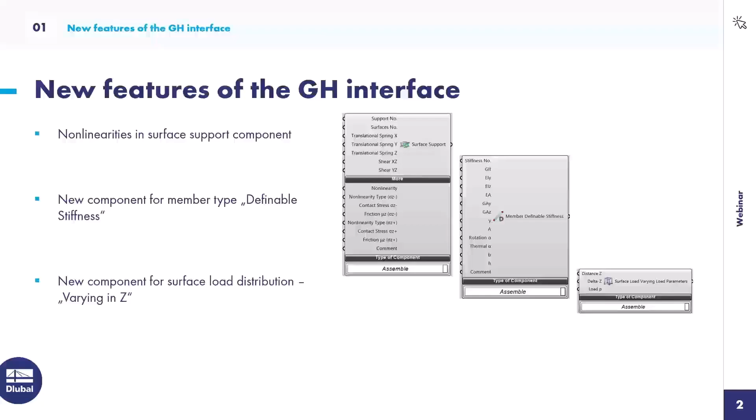The third component is a link to the surface load component. We extended it with load distribution varying in the Z direction. So in case you need to apply hydrostatic pressure on a vessel, you can use this load, because you can insert varying forces in the global Z direction.

We also created a new component for rigid links. All of those features were wishes from customers, so we tried to cover them as best as possible.

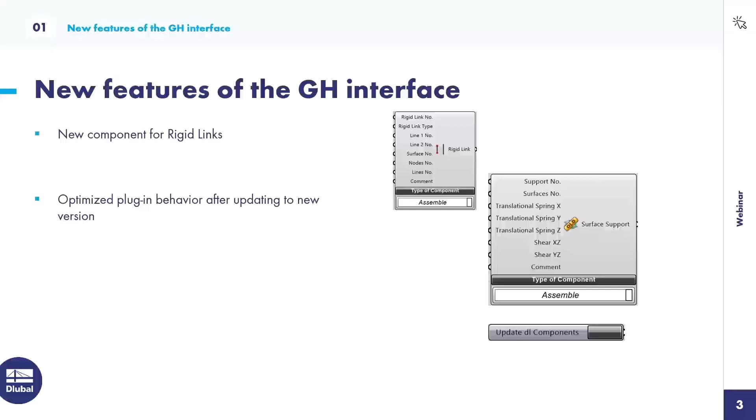The last feature, in my opinion the biggest one and the one I'm personally looking forward to, is an optimized plugin behavior when a new version of the plugin has been installed. This relates to the fact that when you opened an old Grasshopper project with a newer plugin version, the connection wires could become disconnected for some components. That was caused by the fact that we constantly extend current components and create new ones, and when we extend an existing component, those wires get disconnected. This new optimized behavior should prevent that. You get an old tag, the previous component is shown, and a new component where you can run an update, while the wires should remain intact. So that's a good feature for such cases.

All right, this will all come in the next days. Now let's hop into these sample files. Let me introduce them briefly. As I said, we offer those sample files as a download on the webinar page, so you can download them and use them for yourself.

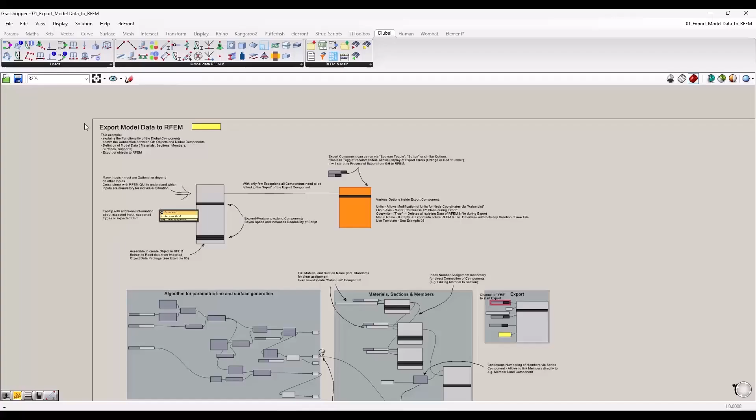Okay, I will open Rhino and Grasshopper and start with the first file. So yeah, this is how these sample files look. As I said, I'm going to start with the export of model data to RFEM. Maybe before we dig into that, a brief introduction of the plugin itself for those who haven't seen it before.

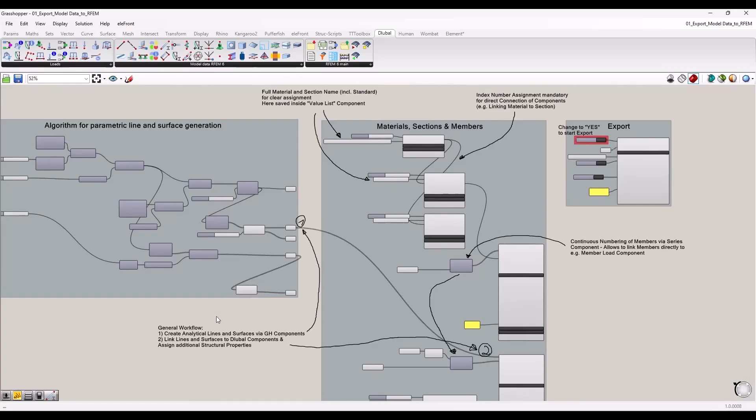You can download our plugin via the Rhino Package Manager. After the installation, you get a new tab here, the Dlubal tab. This one is divided into 3 chapters: the model data components, load data components, and general components. I will focus now on the center group in this example, and start with an explanation of how our components are set up, and then also with an example so you can check it, modify it, and so on.

Regarding the introduction of our components, I left some comments in here. In general, our components work similar to other components that you know from Grasshopper. We have inputs, we have outputs, usually just one. It depends a bit on your use case what inputs you have to fill. I can't say you always have to use this and that input. If you plan to export a tapered member from Grasshopper to RFEM, then you need the Grasshopper line, the section distribution input, section start, and section end, for example.

If you plan to export a rigid member, the member type rigid, from Grasshopper to RFEM, then you only need the member type input. So we can't say this is mandatory, this is optional. My tip here is to check the RFEM graphical user interface, what is requested there from the user, and then fill the same inputs in Grasshopper. We try to give you additional help via the tooltip. Whenever you hover with your mouse over an input, you get additional information.

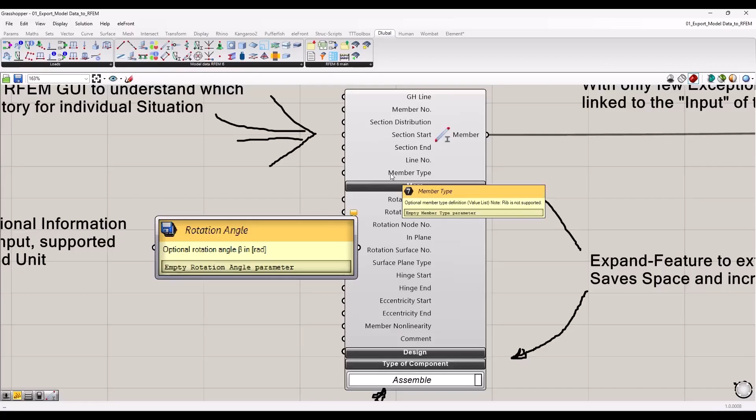Those tooltips contain information about the expected input, supported types, expected units. For example, for the member type, you could ask what's the proper input for that, a string, a value, and then you can see here value list in the tooltip. So you can call up a value list, a very often used feature for our plugin components. It will give you the list of options, and then you can simply select the one that you need. For the rotation angle, for example, you get information about the unit. So also check the tooltips as a quick help if you are not sure how to deal with a certain input.

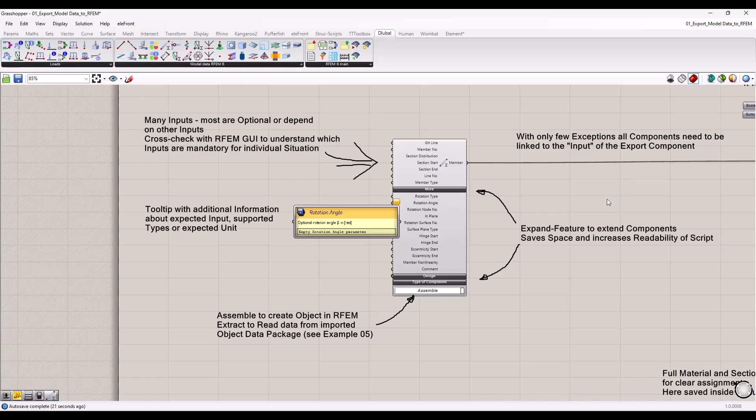We also have an expand and shrink option in our components. Here we have to say thank you to Bollinger Grohmann, Diego Apellaniz. They provided us with this code. It's really appreciated and a nice feature because it reduces the space of the components if you only need some of the inputs. It's simply a nice feature.

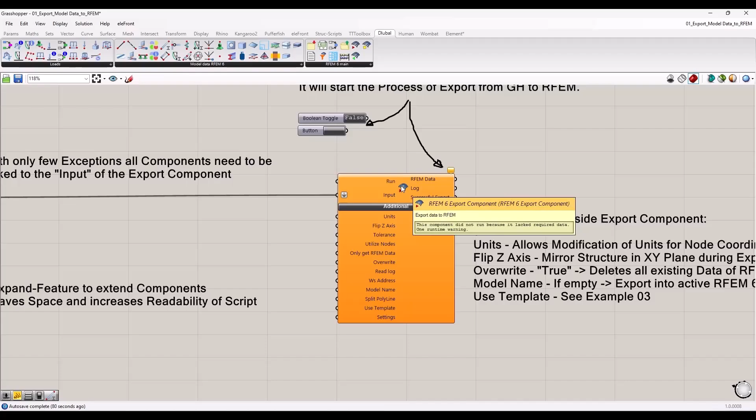Concerning the general setup of a script that has the target to export data, you would create multiple components. I have here one for members. You would probably need additional components for sections, for materials, maybe for nodal supports. You fill them with the information, and all of those components then have to be collected inside the RFEM export component. That's this one here. All of the components are connected to the input, and then you can run the export by a Boolean toggle, a button, or similar options, which you connect to the run input.

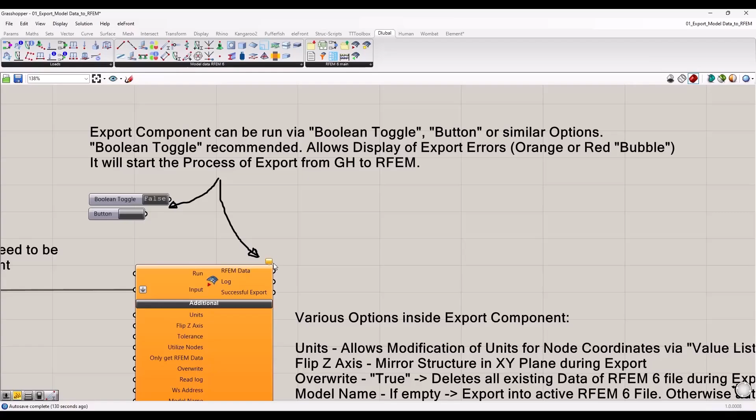My suggestion is using a Boolean toggle. It has two pros. Basically, if you keep it true when you connect it, then you have kind of a live link. Whenever you change something, the export will be triggered again, and you get the result in RFEM directly. The other big pro is that when you made an error in the input somewhere in your script and you leave it on true, you usually get a red or an orange bubble, as you can see here, and this one contains an error message. If you use the button, this error message will disappear a millisecond after it showed up. So that's why I prefer the Boolean toggle.

So far regarding a quick introduction of the components. Now we can take a look at this little example down here. Let me show what I did. I have here a group which represents native Grasshopper components. So that is all components which are basic in the Grasshopper

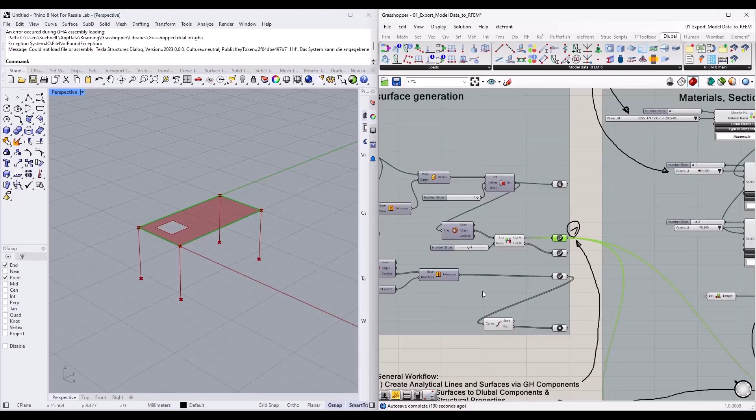program. I create just a little structure, a couple of columns, a slab with an opening, and I collect all of these objects here in these surface, curve, and node or point components. And I will use these lines, surfaces, or these objects later on in my Dlubal components. And how I do that, I will also show now in a second.

Basically, if you take again a look at the member component, I think it makes sense to use the lines that we just created via Grasshopper in our member component, as the analytical line, as basically start node, end node. So what I'm doing here is I connect simply this curve component with our member component, with the Grasshopper line input.

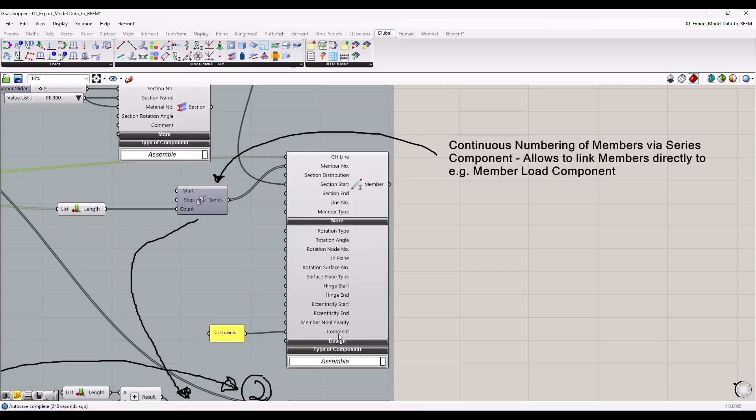Then you have additional inputs to assign the required and necessary information. What section do you want to assign onto that line? Maybe you want to assign additional comments or even eccentricities. That can then be done via direct inputs or additional components.

I also create here a material and a couple of sections in this little example. Here we often get the question, will you provide a library for the materials and for the sections as a component? And we actually decided against that. The library in RFEM contains hundreds or thousands of materials and sections. So we don't see the point of having such a component in Grasshopper. It is quite easy to create your own little library.

I'm using here a value list. In that little example, you can edit the value list. You just fill in, let me use this one here, that's better. You fill in the short name that you want to see when you open the dropdown, and then the full name that is expected by RFEM. The full name usually contains also the standard. So if you document it in that way, you have a nice little library where you can choose those materials that you frequently use. Okay, small tips like that are mentioned in these sample files.

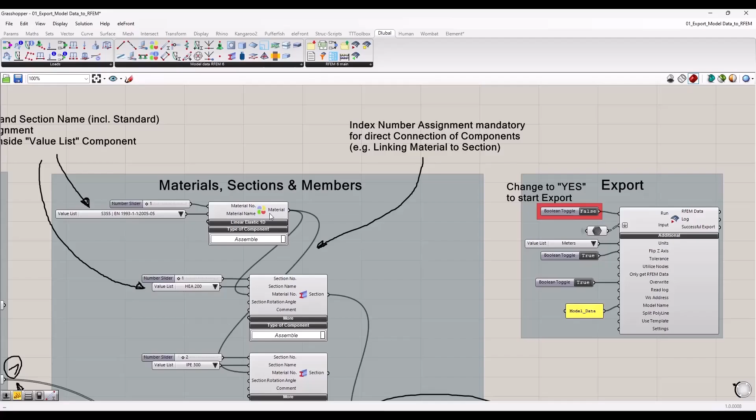An important information is also shown here. In my webinars that I give about the Grasshopper interface, I usually connect my components directly, material into the section component, because in a section the material index number is a required input. So it is just logical to connect them.

This connection, however, only works if you assign the index number to the material, because actually here the input expects a value 1, 2, 3, 4, 5. So the index number of the material, and this information can only be shared if it is assigned beforehand. That's important. Keep an eye on the index numbers of the components.

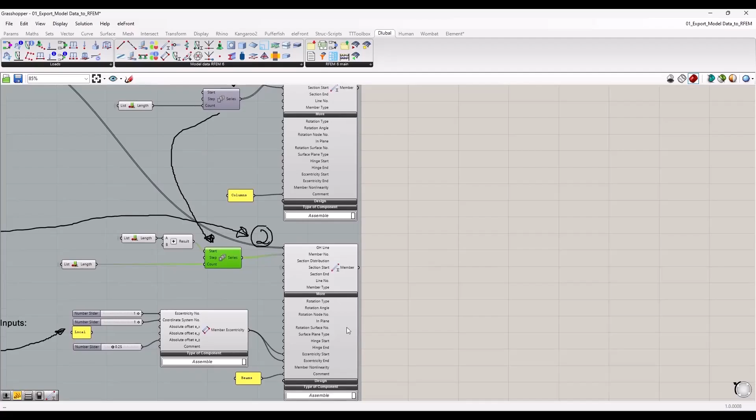It is not that difficult, even if you think about members, where you have maybe hundreds or thousands of index numbers. You could use a series component, which you link to another series component for additional members, to count basically the lines that you have collected in here and assign numbers to that. That's quite easy.

That example also creates a couple of nodal supports, thicknesses and surfaces, with additional information how you can trigger a fixed support, for example. And at the end of the example, we have the export, and here highlighted in red the button that you have to press to start this whole example. As I said, a Boolean toggle, and this is what I want to show here as well. So let me quickly run the export from that little file to RFEM.

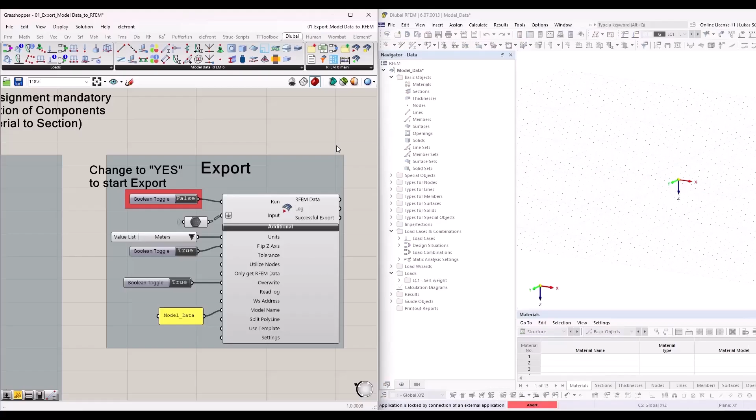I double click on it, and now the programs will communicate with each other. And in a second, I should see the result. Okay, here we are. I stop the export again. I set it back to false. With that, I make sure that whenever I change something, it will not automatically trigger the export again. As you saw, it takes a couple of seconds, and you might want to modify more things before you run the export. So that's why I set it back to false. You can leave it on. That is up to you.

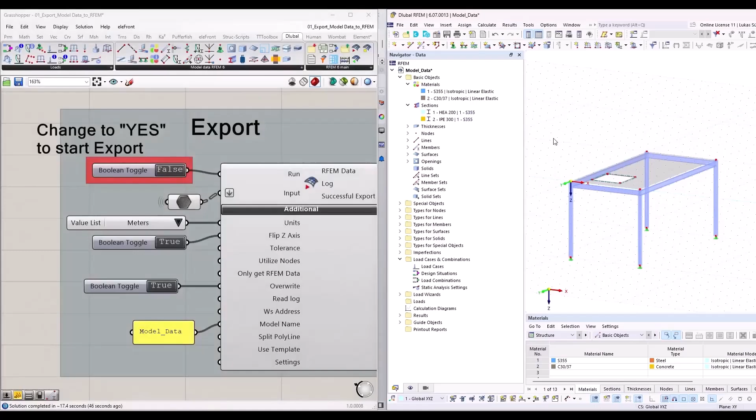And as you can see, the result is clearly visible. We have the same little structure. I have here eccentricities assigned on these members. As I showed before, materials, cross-section, everything has been exported correctly. The nodal supports. So that is the first little example that I wanted to show here, the export of model data from Grasshopper to RFEM.

All right. Then let's have a look at the second little sample file, which is about the loading. I could have done it in one, but I feel, if you begin with the interface, it's a little bit complex, like maybe too much information on one file. Therefore, I split it up in 2 sample files. So that's the one for the loading. I will increase the size again a bit.

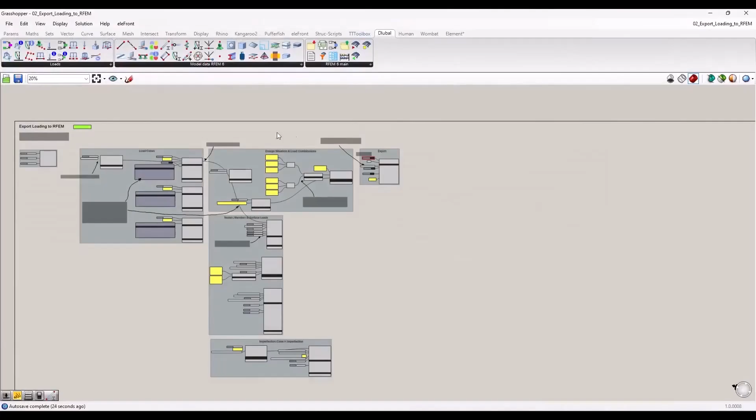And maybe as a quick introduction, what we cover here in our loading chapter: you can create load cases via the Grasshopper interface. After the load cases, you can also create load combinations and design situations. And design situation, ultimate limit state, serviceability limit state, those types which are required as an input in the load combination. And then you can export these load combinations.

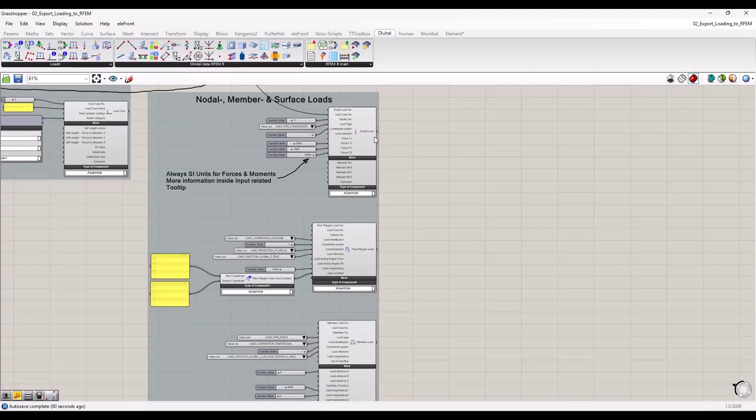Additionally, this sample file covers a couple of loads. Obviously, you want to create loads inside your load cases also in Grasshopper. I mean, probably up to you. And here we cover nodal loads, surface loads, member loads, line loads. There are more options here. I just use 3 of them in this little file.

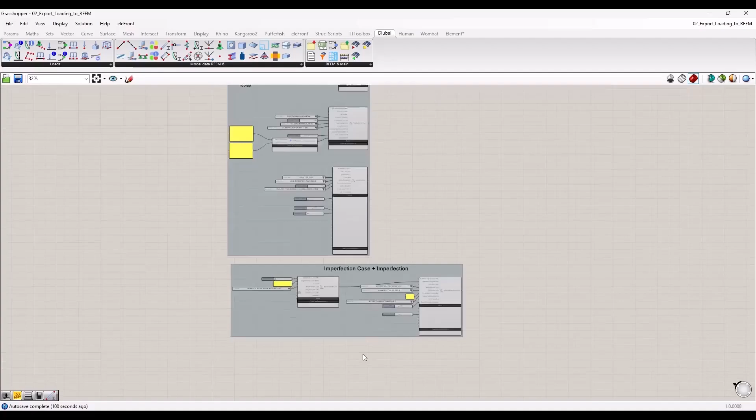And on the bottom, also a topic which should not be dismissed, imperfection cases and imperfections. Initial sway on columns, pre-camber. Depending how you plan to run the stability analysis in RFEM 6, this might be necessary, and you can create it via this plugin. So let's have a brief look at the sample file as well.

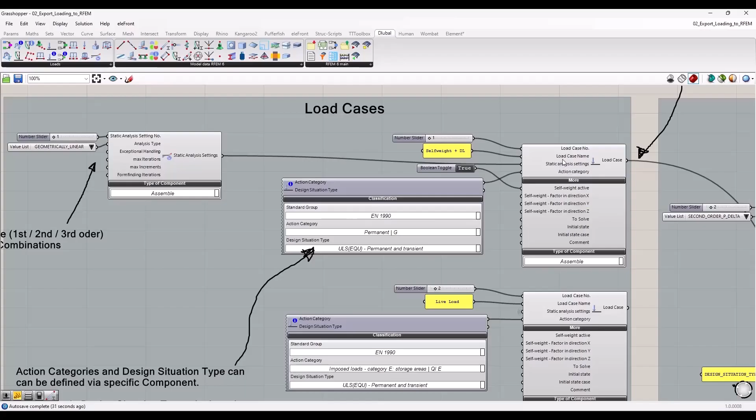Regarding the load cases, I think it's clear that we can create them via Grasshopper. Important information is the static analysis setting. Should it be analyzed according to first order, second order, and so on? That's an additional component. It is shown here how you can treat it and handle it.

Another important input for load cases is the action category. Basically, is it a permanent load case? Is it a live load? In case a live load, according to Eurocode, is it a group A, B, C, D, E live load case? There are different options that you can select via this classification component.

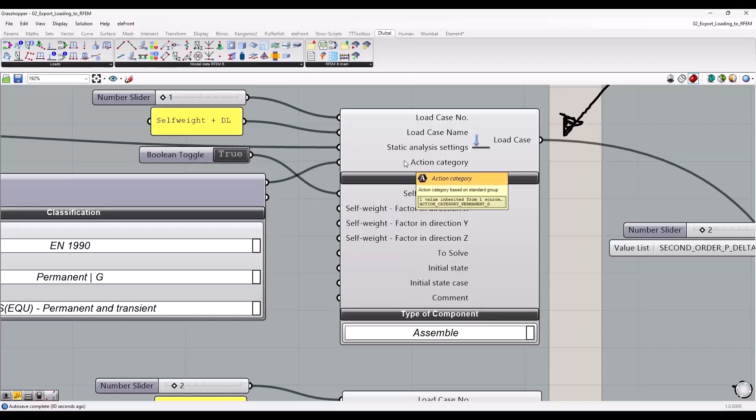It's like a little library, because the expected input for the action category is a relatively complex string text. You can see it here in the tooltip, action category permanent G. That is nothing which you know directly. You don't know how to input that. That's why we create these strings via this component. This is how I set up load cases. I fill these load cases with loads, as I showed before.

Here, maybe as a comment, any value that you have to input into our components usually is related to the SI units. So meters, Newton, as a simple example, most common stuff. You cannot change these units into anything else. So this transformation can be done via a little recalculation if it's required.

You can easily use a multiplication component, assign the proper factor to convert a pound force into, I don't know, a kilonewton related unit, or SI related unit. So that can be done in Grasshopper, and here as an information, we always expect the SI units. I documented it again in the tooltip, as you can see here, Newton, or for moments, Newton meter. That's also why I'm using high values here, 2000 Newton for 2 kilonewton.

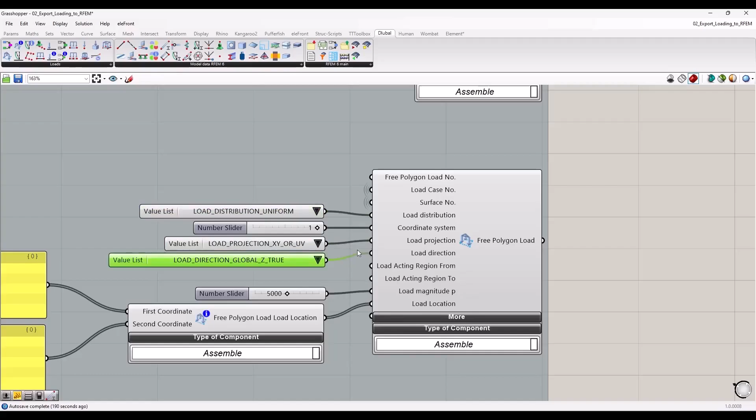Also obvious, I hope at least, if you deal with the load components, we use a lot of value lists here to define the proper load. There are various ways how to create a load, and most of these inputs can be defined via value lists. All right, so far regarding the loads.

The load combinations can be built manually via our plugin. This component's basically divided into subcomponents. We have the general load combination component.

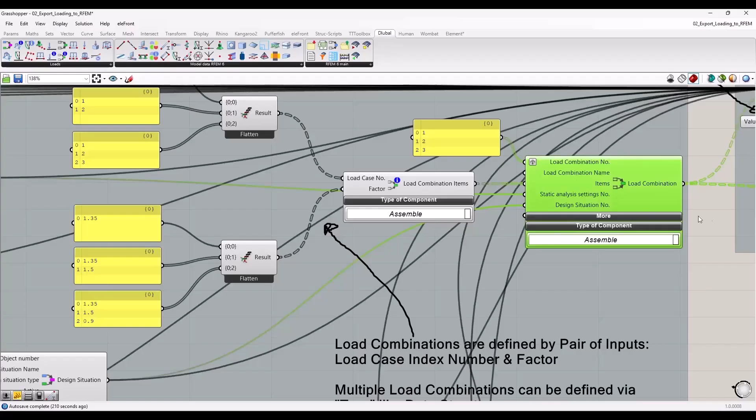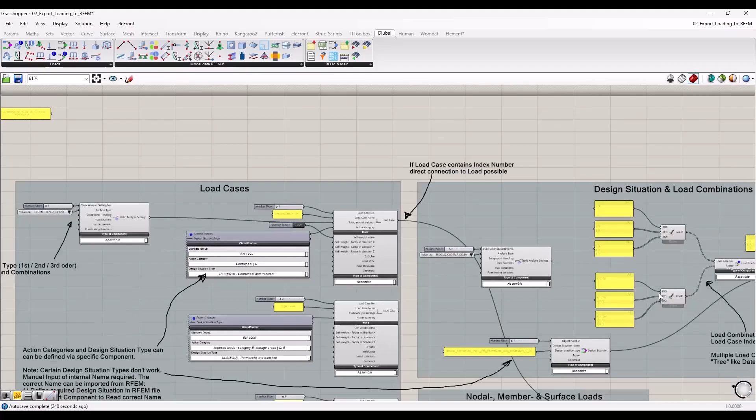Here you can assign the static analysis setting, you can assign a name, you can assign the numbering, more settings as well. The actual combination will be done in a second component, the load combination items component. Here you combine the load case index number, so load case 1, load case 2, 3, depending which numbers you assigned to your load cases, with the factor 1.35, 1.5, 0.9, whatever is needed. And this combination can be done via little lists.

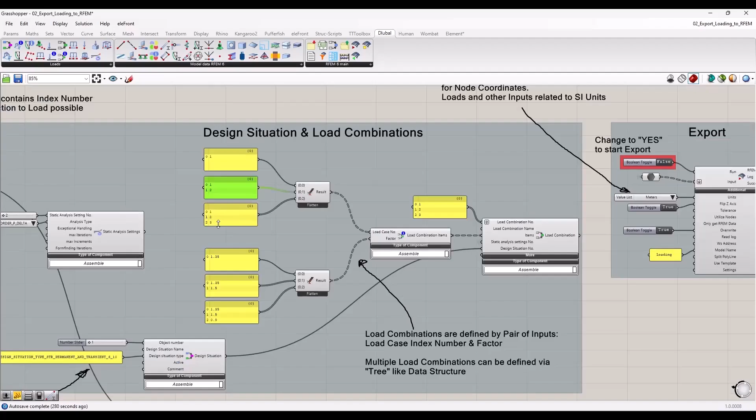So the first load combination that usually comes to mind is the dead loads multiplied by a factor. That's basically load case number 1 multiplied, based on the Eurocode, let's say, with the factor 1.35. Next combination is dead loads plus live loads: dead load case number, live load case index number, 1.35, 1.5. So that's how you can set up multiple load combinations via Grasshopper.

And if you have all that, you can connect it again to our export component. Same logic. Here I used a little data component in front simply because, to connect these components, sometimes you have to zoom out, at least as far as I know, and then draw these lines from here to here. So what I do is I have this little data component, which I move to the place where I need it, and then have an easier connection. That's all about it. It's not required to do it that way.

Let me also show that export. Again, we run the export by double-clicking on the Boolean toggle. Wait a second. All right, export is done. Let's have a look. Same structure.

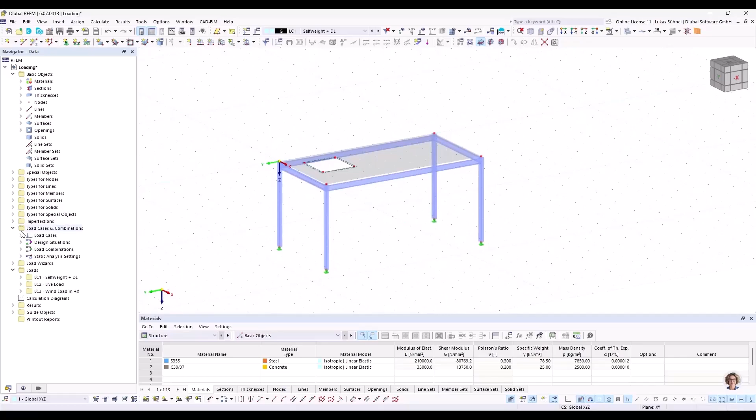That was all part of this cluster file. New are the load cases, the design situation, the load combination. This all has been created via Grasshopper. Also the imperfections, as we see here, or the loads, node load, surface load, and also wind load as an example. All right. So far regarding the second sample file. Now let's have a look at the third one.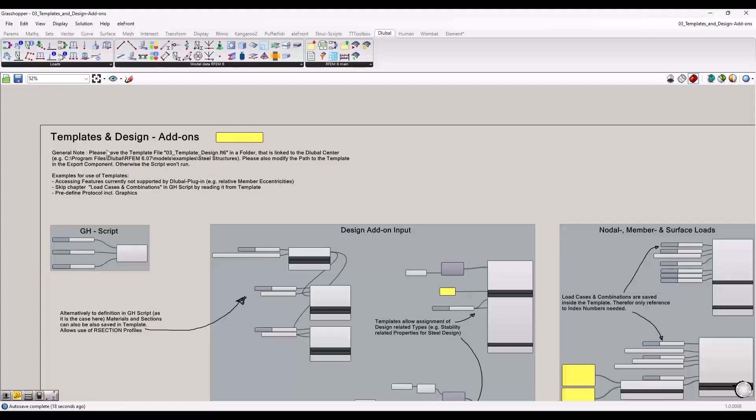The third one is about using templates and how to control the design add-ons. So first sample file, how you can export model data. Second sample file, how to export loadings. I think it's quite clear what we can do in general, what features we cover here. Now, templates is a completely additional topic, I would say. It's really a strong feature which you may or may not know from RFEM 6 or previous versions. Let me show it maybe in advance.

Think of the following example. If you analyze or design the same kind of structure again and again, maybe you have the same kind of load combinations, or your protocol always looks the same, the same graphics are included and so on. Then you don't have to do it every time from scratch. You could use a so-called template.

You create such a file once, so you would create a new RFEM file where you define all these settings and properties that you want to save in such a template file. Then you save it as a template, and whenever you create a new file afterwards, you can refer to that template. So basically you create an empty file into which the information from that template file will be imported. And let me show that as well.

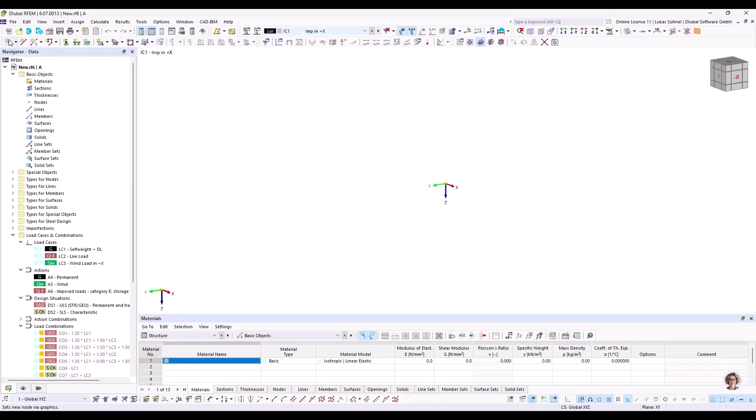Little spoiler, it contains graphics as well. So yeah, that is a feature that we can use manually in the RFEM graphical user interface. And we also have access to that via Grasshopper. Creating such a template is manual work in RFEM, but once you saved it, you can also use it in Grasshopper.

You basically just link the path to that template to our export component in the use template input. That's all you have to do. Then the template will be preloaded into the file that you create with your normal export. And one thing that is quite important for that workflow: you should not use overwrite during the export. That would overwrite the data that we import with the template, which is basically nonsense in that moment. So make sure to set it to false.

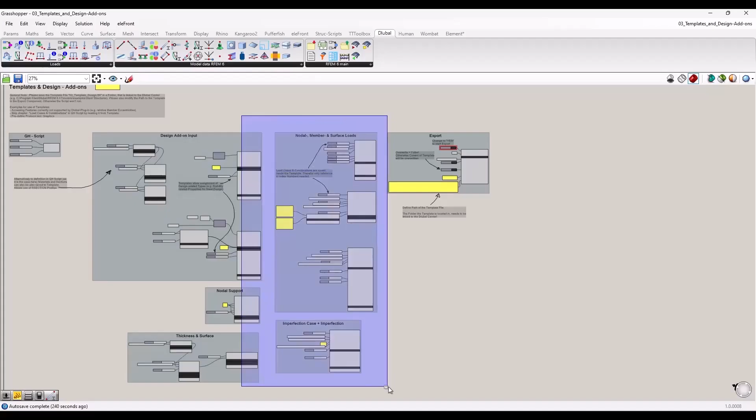And then you can use those types, the information that you have in the template, in your Grasshopper code. And how can you use that? Well, let's go back to the example with the load cases and combinations. Let's say you don't want to create these load combinations manually in Grasshopper, as I showed before. This whole chapter is missing here in that example. I have some model data and some loads, but the load cases and combinations have been skipped. They're part of this template file.

And if I now create a new load, a node load, a member load, whatsoever, I need as an input the load case index number. Load case 1, 2, 3, 4. So all you have to do is assign the index number of the load case this load should be placed into. Obviously, this requires the knowledge of what load case is what index number, but that is okay, I guess.

Where else could it help to use templates? They can also help you to access features that you can't control via the Grasshopper plugin. For example, currently our member eccentricity component only allows generating eccentricities with absolute values. In RFEM itself, I can quickly open a file, just a second, we have additional options. We can define eccentricities as relative. We could say the eccentricity should always be the distance between the center of gravity and the top flange or something like that. Let me show that in a second.

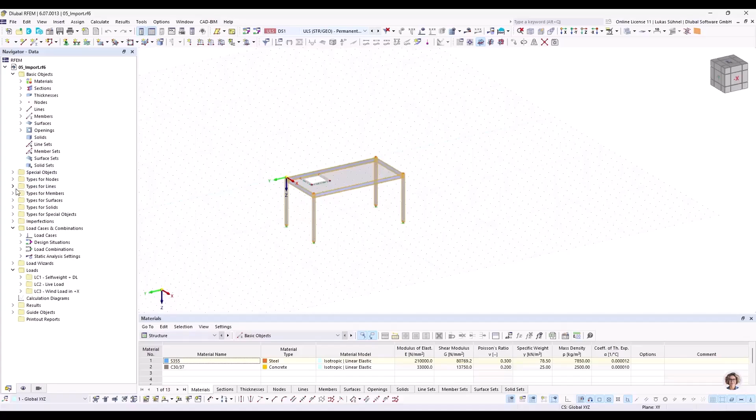Okay, if we think about member eccentricities, then instead of just absolute values, I have additional options in RFEM. I could, for example, create an eccentricity which is relative, so depending on the cross-section size, it will always take half the height as an eccentricity. And I can save these eccentricity types inside my template and then use them in Grasshopper. So instead of creating the eccentricity manually and assigning it to the member component, I could just assign the index number 2, which is the relative eccentricity, to my member component. So templates also allow me to use features that are not covered by our current plugin.

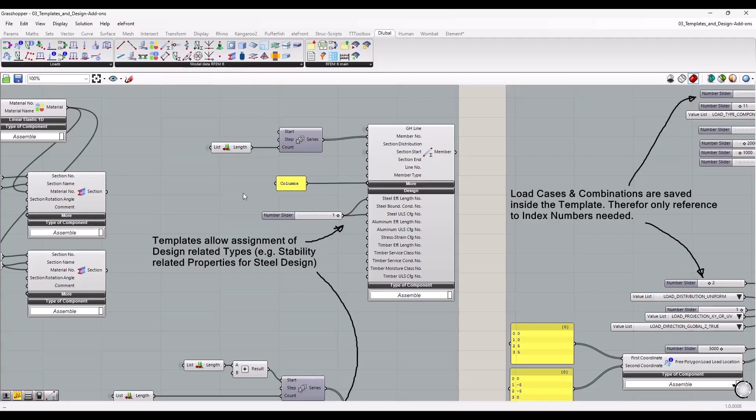Just another example, you could skip the whole generation of materials and cross sections. You can save them in a template and just assign the index number into the section inputs of the member, for example. And the last feature that I want to mention is the control of the design properties. Let me show that again in RFEM.

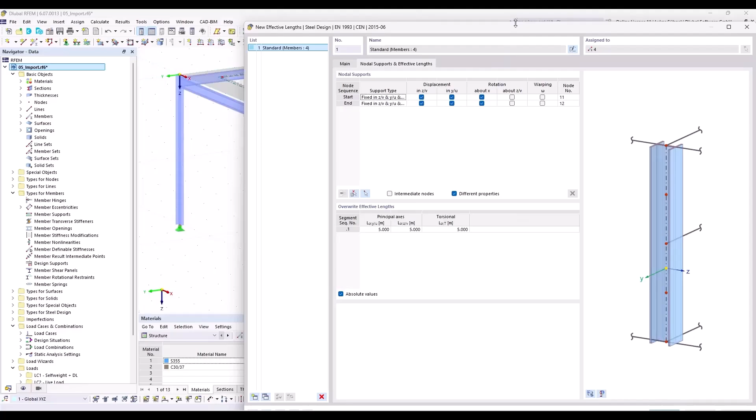Let's imagine we want to run the steel design in RFEM afterwards. For the steel design, we have to define additional properties. What's the buckling length of the column? That's a property inside the member dialog, design types. Here I can say perform flexural buckling, lateral torsional buckling, and so on, all these checks. And then use as a buckling length maybe 5 meters. These inputs are relatively complex for a Grasshopper component. And as a quick solution, until we have them as a component itself, we thought of the following.

You could create these types in advance in RFEM. You could create an effective length type for a single span beam, supported at the start and at the end, which probably covers 70% of the cases. Then you could create a couple of additional types, maybe one with an intermediate support in Y direction, maybe with 2, 3, 4 intermediate supports. So you could create multiple types, save them in the template, and then use them as input in Grasshopper.

Same logic. In the template that I have used here, which is also provided in the download folder, I have multiple types. I have effective length type 1, which is a single span beam, I think, and the ultimate limit state configuration.

In both cases, for those members, I want to use type number 1. Here I switched it up - I used the second ultimate limit state configuration in this second group of members. So that is how you can assign already design-related information inside Grasshopper.

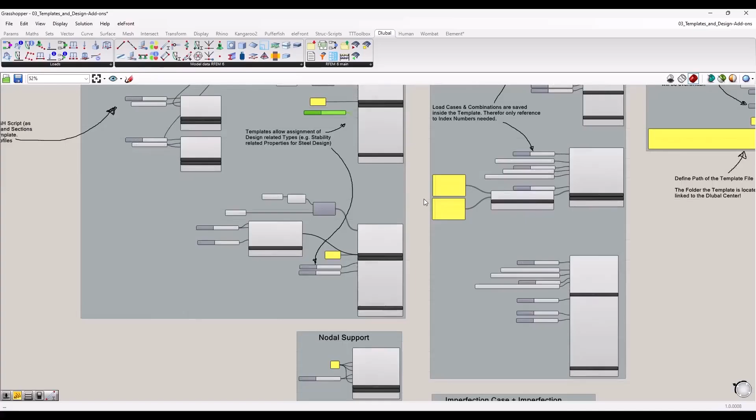And then you save time again in RFEM. That's the purpose of that. That's, in my opinion, what speaks for using templates. Additionally, this part with the protocol, which you can also save inside the template, so you can skip the generation of that manually in RFEM - it can already be imported via the template.

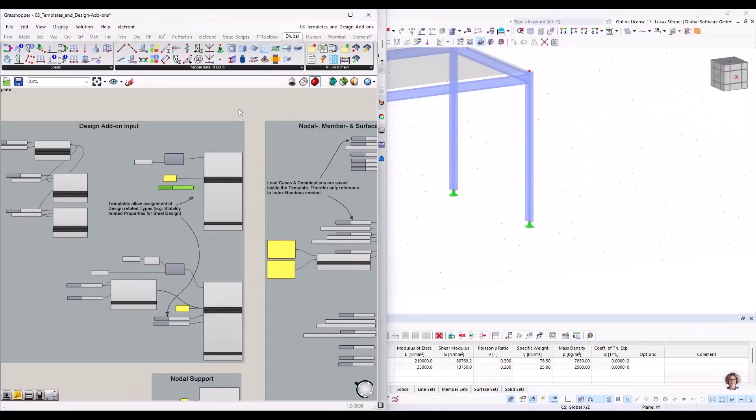And now let me show what I did here. So I will close the RFEM file that I have, put it to the right hand side, and run the export.

I'm basically creating the same file that I had before in sample file 2. I just skipped the whole load combination part and load cases part - that is part of the template. I also have a protocol included in here. Let's wait for the result.

It's a bit slower due to this webinar software. All right, now it should be finished.

Okay, so we see again the same structure, this time however with more load combinations - the ones that I saved in the template file. And then again, I was able to use these load cases for my loads. I assigned all of this information anyhow in Grasshopper. Additionally, I have assigned steel design-related information onto my members.

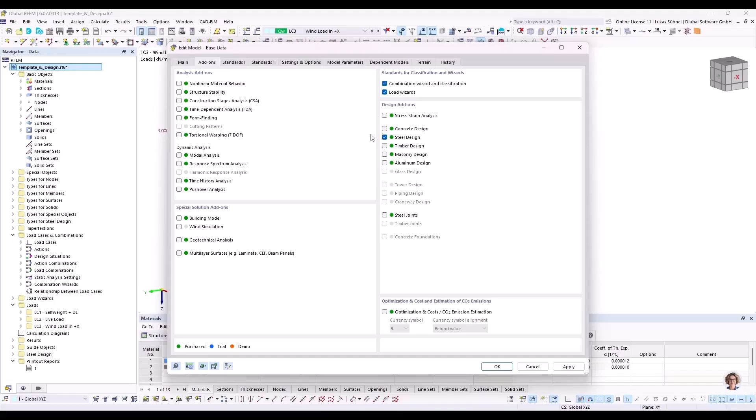First of all, inside the template I was able to save also which add-ons should be activated. We have no control about that in Grasshopper currently - there's no component where I can say please activate steel design. This information has been saved in the template, as well as the information what code should be used, what national annex.

And then additionally, as I said before, I created a couple of effective length types. I used only the first one, I think, on those members. Single span beam type has been assigned directly via the plugin, and also design configurations, which we can find down here. I created multiple in my template, and I'm using plastic and stability analysis, elastic and stability analysis - various types that I assigned via Grasshopper.

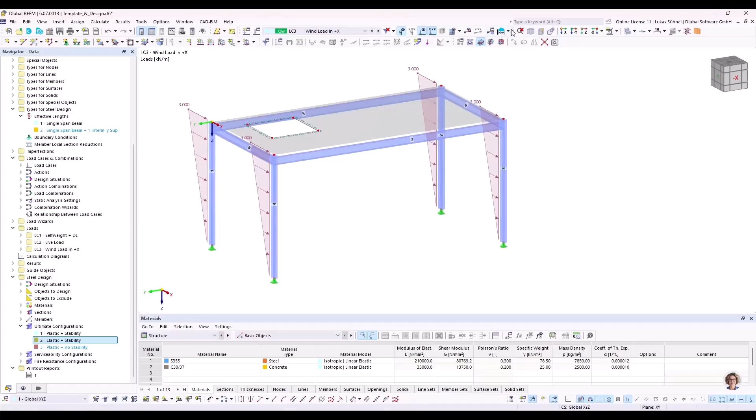And then I can run the analysis. Let's quickly do that.

There was also an option while it's calculating - there are two options: calculate locally and calculate in cloud. That's a new feature, kind of. So when you have big files which require a lot of power, an alternative way could be to send the calculation file into the cloud. There are different PCs with different amounts of cores that you could use, and then it will give you information when the calculation finished, so you can download the file with results again.

And in the meantime, you can work on something else while it's calculating in the cloud. If you do it locally, your PC might be very slow due to the multi-core use of the calculation. So that's just as a side information here while we were waiting for the results.

Okay, so the file is calculated. What I wanted to show is that since we were able to assign all this information in Grasshopper already, I have now also results for my steel design ready here. All I had to do is run the calculation in RFEM after the export, and I have my results ready here, as well as the protocol, which I mentioned a couple of times now that I saved it in the template.

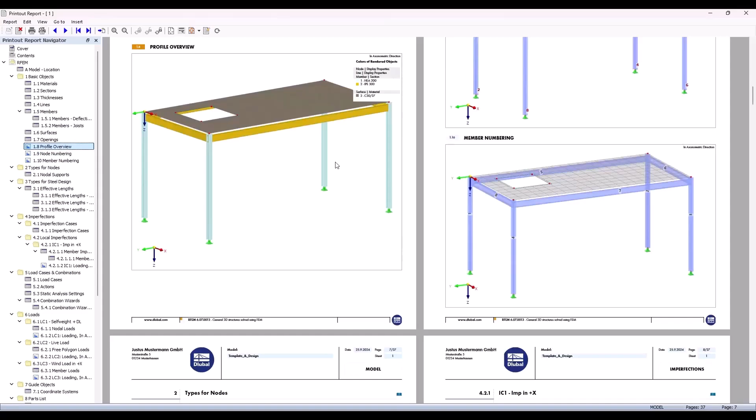Yeah, there it is - usually much faster. So here, these are all graphics, for example, that I included in the template, and I have them already here without manual modification. Load case related graphics, and even one for the design result.

So templates in general for RFEM could be a big help for designing the same kind of structures again and again, or in the daily work in general. And it's also a big, big benefit for the Grasshopper interface as well. Okay, so far regarding that.

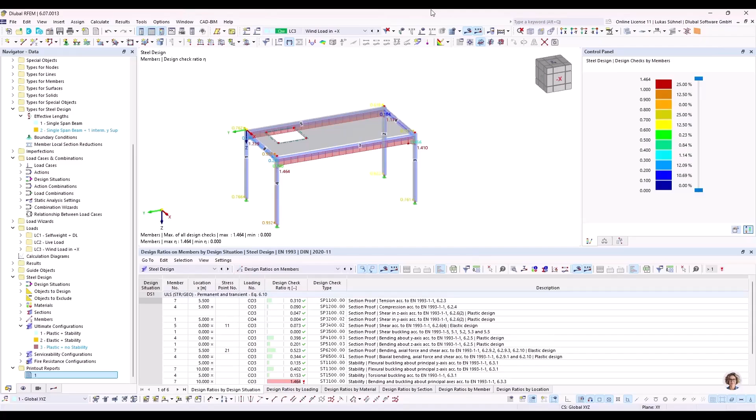Let me go to the next sample file, number 4, which is about anything that comes after the usual export. You create model data with Grasshopper or RFEM, then you create load cases, the combinations, you define the loading, and the next step usually is to deal with the mesh, mesh settings, and then you run the calculation, then you somehow deal with results, and this will be covered here.

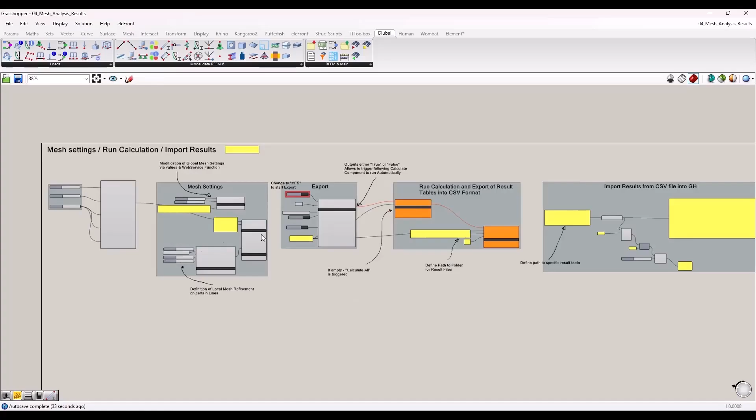Different groups here. Again, it is built up on the previous example. You can see here that's the code for the model data, for the load data, and so on.

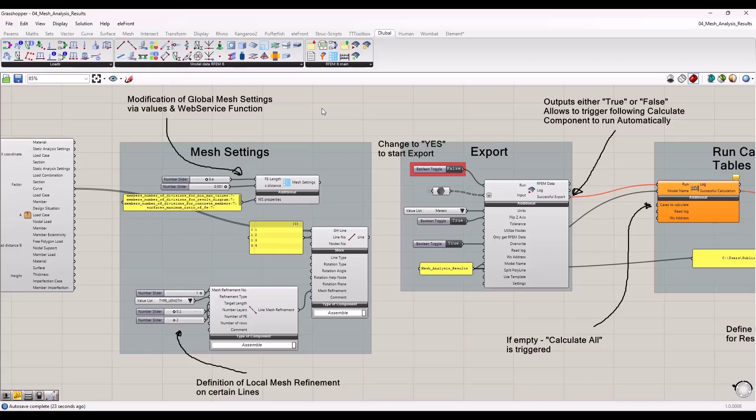I wanted to set the focus on these additional topics. The first one is about the mesh settings. We have here, for example, a component for the global mesh settings - what should be the target length of the finite element in general, and so on. Then we have additional components here represented by the line mesh refinement to refine the mesh on specific objects, for example on certain lines. We could also assign a nodal mesh refinement or a surface mesh refinement - various options how you can manipulate the mesh via Grasshopper.

The next step would be obviously to calculate that structure. Again, all these components should be connected with the export, and then you can run the export to RFEM and you have a proper mesh, which is nice. But before we do that, I want to cover also the next steps.

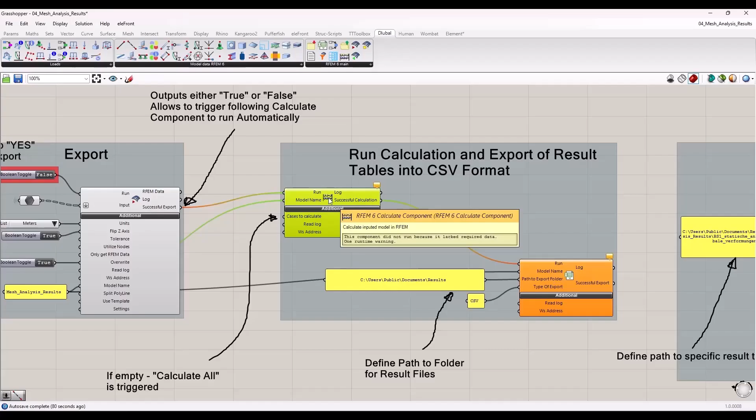Instead of running the calculation manually, as I showed it before, you can trigger the calculation also via a calculate component. Here you can decide if you want to analyze only specific cases, just specific load cases or combinations, or if you leave that input empty, then calculate all as a function is triggered in RFEM.

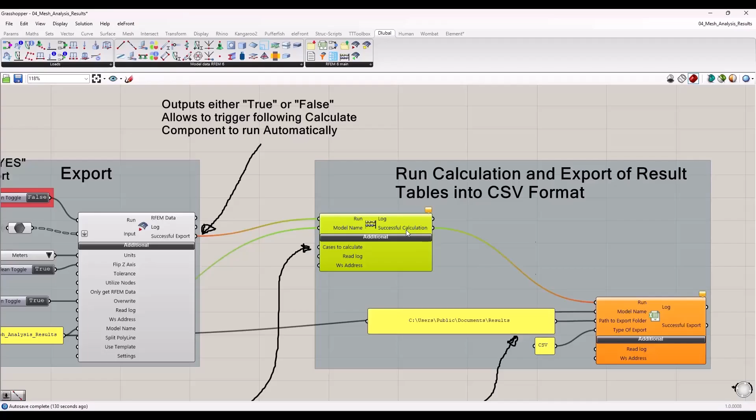How does it work? It is kind of like a stepwise export. We start with the regular export of the model data, load data, and mesh information. Whenever this export is ready, it will give us a Boolean parameter, a true. With this true information, I can run the calculate component. And when the calculation is finished, I get again a true output, and with this I start the export of the results.

That's another component, part of this chapter here. I can export my results into CSV or XML files - that's the option here. You only have to specify the location of the folder you want to have the results in.

When the export is finished, you can read the content of these files. This is, however, pure Grasshopper components, so this is not specific to RFEM - that's a read file component from Grasshopper, and then just some data handling to get maybe one specific value out of that whole file.

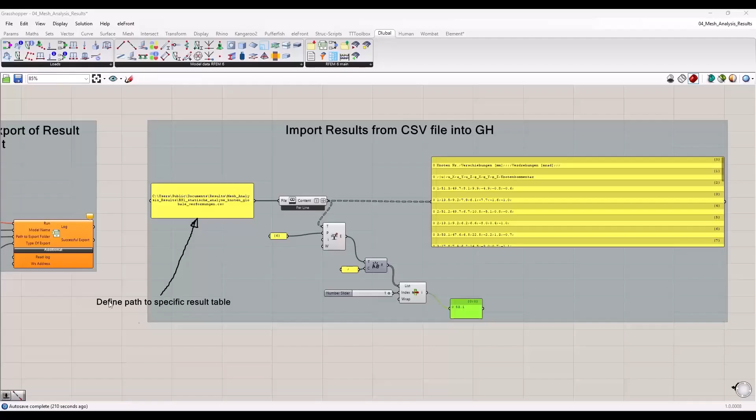To show it, I quickly want to remove the existing results, which I forgot to do, so that it should be empty here now. Just let me delete the folder. If I run it again... public results, oh yeah, sorry, public results. Now it should be empty in a second. Okay, I just deleted the existing results.

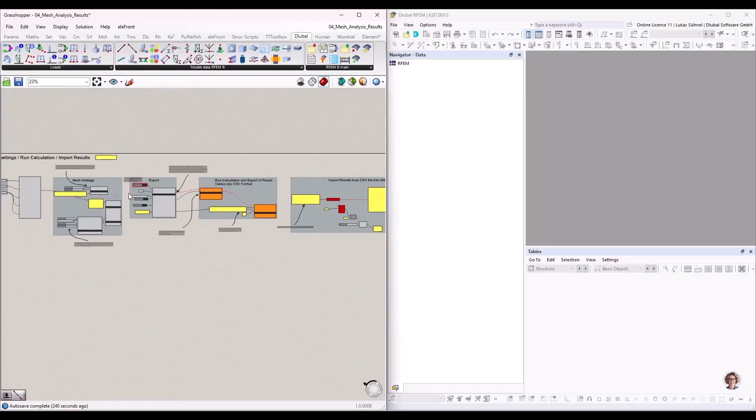Now you can see that, of course, this script is failing - there is no such file. I want to show the process now live. Therefore, again, I will run the export first, and this is now a stepwise export.

It will basically, you can see that on the bottom of RFEM, run the export of the model data, load data, and so on. Then it will make a little pause. Now it's running, then there's like a pause. Then after that pause, it's starting to run the calculation - you can see that mesh generation and calculation in a second, without the dialog, by the way. You don't get the dialog if you start the calculation externally.

And then again, a pause to export the results. That's how it's done currently.

Currently, we also export all result tables, which can also be controlled inside a template. You can select which result tables should be generated, so you don't have to deal with all the result tables always. Now the export is done. I can cancel this export, this whole process. What I have to do is, because this is the English webinar today, my tables are named slightly differently, so I will change the name of that path here.

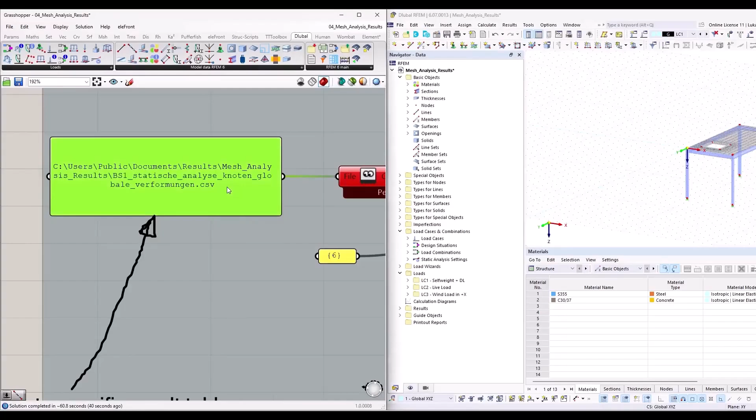So I can show it even. These are the CSV files that we now received after the export, and I can use, for example, copy. I can use this one, replace it here. Oh, that's working correctly, looks good.

And then I have here the results, the global deformation on nodes, as a result table in Grasshopper. With a bit of filtering, I get the maximum nodal deformation. That is the fourth sample file.

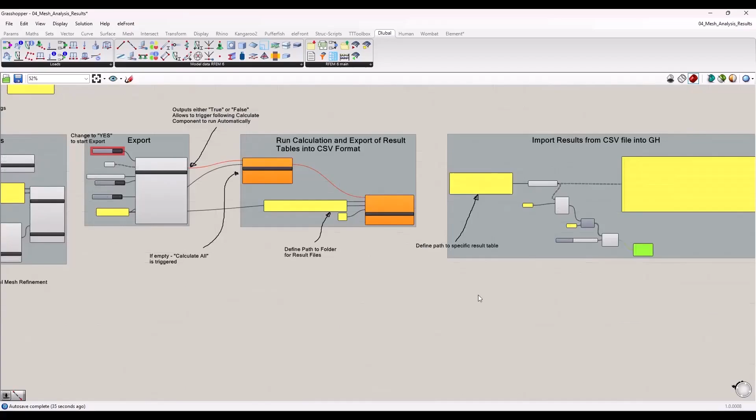You could think about additional features now. You might say, hey, if I have a result in Grasshopper, I could use additional plugins like Galapagos to run calculation loops. I showed that in a different webinar briefly. You could say this is the target value which you want to optimize - you want to reduce the deformation, and as a manipulation, it should manipulate the height of the structure, the length, whatever, and then it could run automatic calculation loops. Just as an idea.

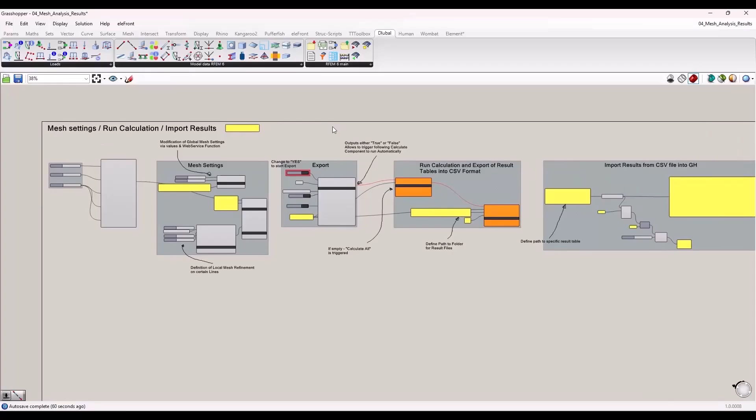Okay, so far regarding the fourth example. Let me close everything again. And then we turn the way a bit around. Now I open a file in RFEM6 in advance, and I will open also the 5th sample file. This one is about importing data from RFEM into Grasshopper.

So the other direction basically is also possible. Instead of the export component, you have also an import component, and with the import component, you can read information from RFEM into Grasshopper. Let me double check, still waiting for the file to be opened.

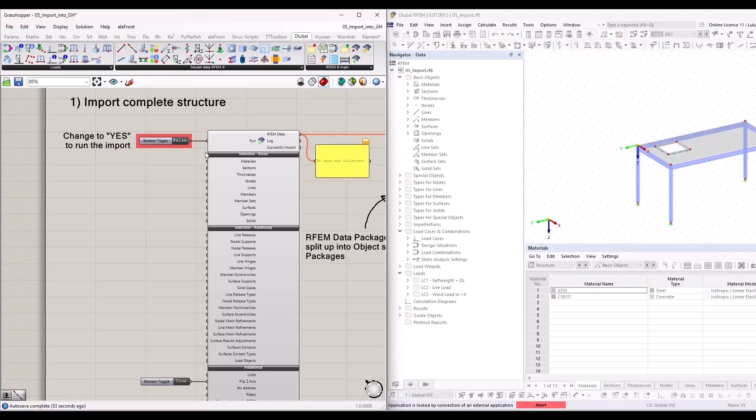Okay, so let me put that on the right-hand side. It's the file that we created before, that on the left-hand side. And basically we can import, or we can run the import again via a Boolean toggle. Here it's basically required to use a Boolean toggle because it has to stay active.

So I imported my data and I get an RFEM data package. That doesn't help me at all in the beginning, so I split that global data package up into object-specific packages - that's this RFEM data component. And I still have unreadable data packages, so-called Goo objects or containers.

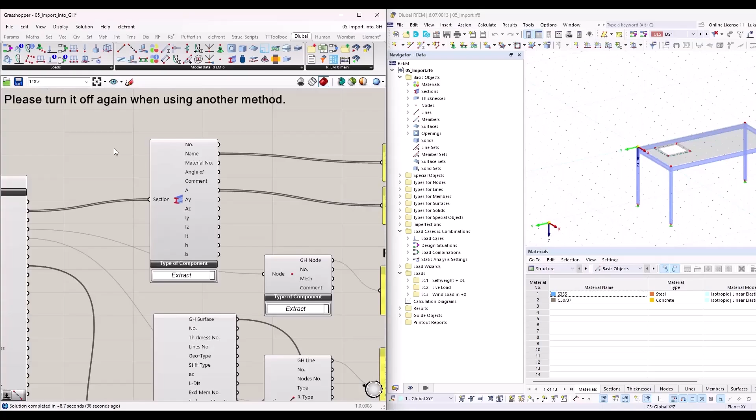And I can read the information from the section package via my section component. This is the same component that we used for creating a section - the component for creating a section - and I can switch it around from assemble to extract, and then that's the same component. It basically mirrors the inputs and the outputs.

And then you get the results that you expect, the names of the sections, maybe here the area of the sections in square meters - SI units always. For nodes and lines, you get also real Grasshopper nodes, real Grasshopper lines, and also surfaces.

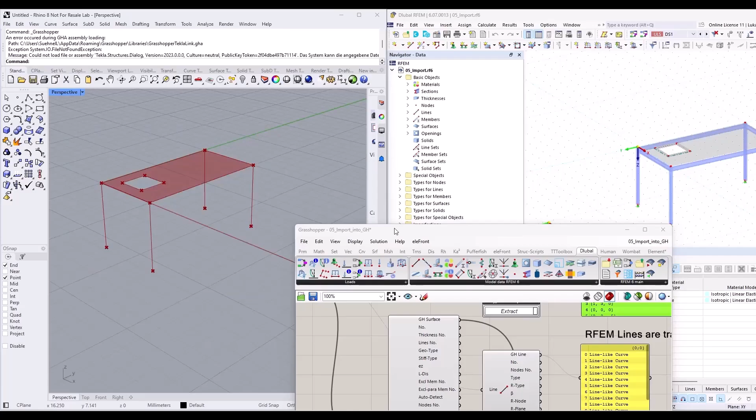So what you can see now in the viewer of Rhino, I basically imported the analytical lines and surfaces from RFEM into Rhino or Grasshopper. You can bake them and use them somehow if you want, for example.

We can modify the import a bit, because now I imported everything in big files. That is maybe a bit performance-wise questionable if you want to import everything - depends what you plan to do with that. You can also import only specific objects, using Boolean toggles to tell the import component to import only nodes and lines and skip the rest. Then the import is much quicker because it only has to read a couple of information, not all of them. So that you could use.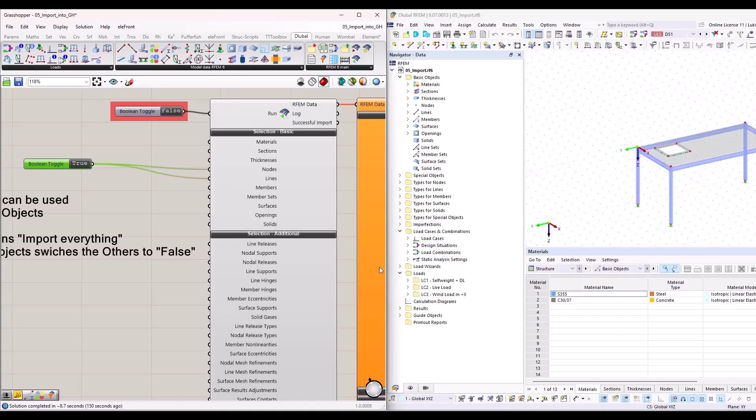As soon as you assign a true command to any of those inputs, it will only import that, and the rest will be set to false. If you leave it empty, if you don't assign anything to these components, everything will be imported. That's the logic here. And then again, we split the information up.

Let me quickly show that. We see we imported the nodes again, the lines again. I skipped the surfaces this time, and we can also see that other information won't be shown - sections - because I simply did not import them. All right, then we have also filter options.

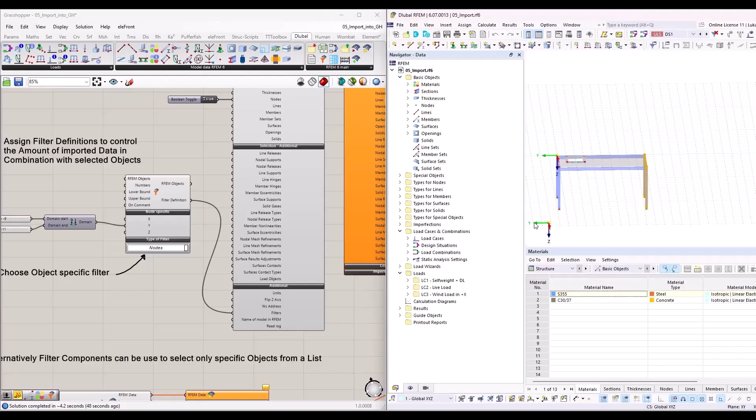I can use them before the import or after the import. These are the next two examples in that sample file. I have here a filter component, and with that filter component, I can specify in more detail what object I want to import. Again, I want to import only nodes, but not all of them. I'm just interested in the nodes of the frame on the negative Y direction side for some reason. I only want to import those four nodes.

So I use my filter here. I can again switch between certain types, and I can say, please import the nodes with the Y coordinate between -9 and -11. And if I do so, I should get only 4 nodes after the import. That's the case. And as I said before, I can also use the filters afterwards.

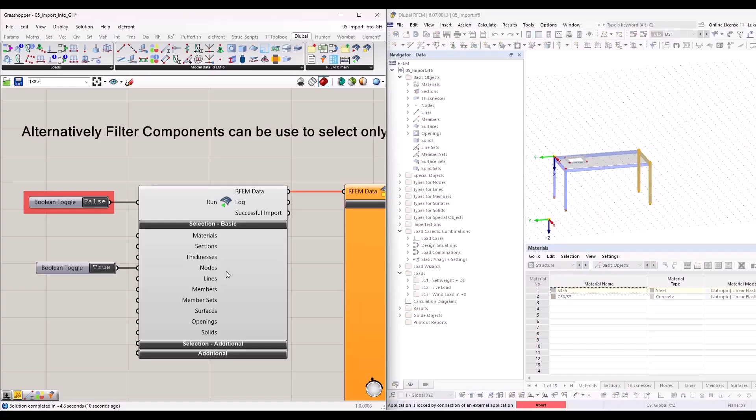So let me run the import here as well. Same example, I import all the nodes. Now really all nodes, but then I want to split up the data package for my nodes. Maybe for some reason I have a couple of branches here. I need these 4 nodes again, the same ones that I used here from -9 to -11, for something else, maybe to create a surface or whatsoever. And then you could use other nodes, again with the filter component,

to do something else. So with those filters you can sort the imported data afterwards, and if you place the filter in front with the filter definition, then you can control the amount of imported data. So that is the import from RFEM into Grasshopper.

When would you need that? Well, an example or an idea, a checking engineer explained to me in a call. He said he thinks about using Grasshopper as a converting tool. Checking engineers deal with different structural programs. They have the task to design the same structure in a different structural analysis program and to convert the data. His idea was to create a tool in Grasshopper. Usually all programs have Grasshopper plugins.

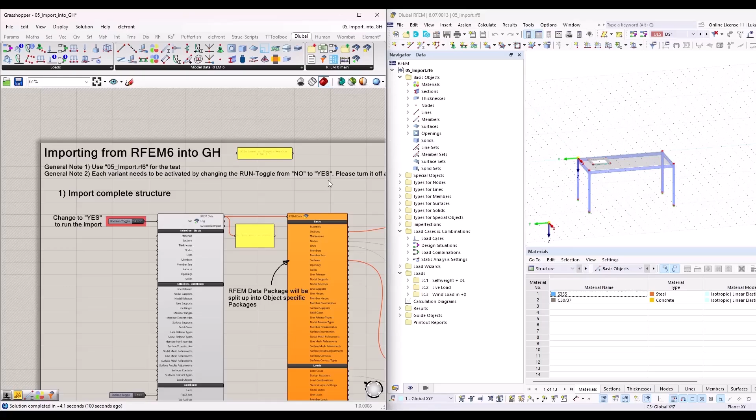So just an example, he's getting the structural analysis from the structural engineer in Dlubal. Then he imports the information from RFEM into Grasshopper, and then he extracts all the necessary information and connects it again to, I don't know, maybe the SOFiSTiK or the SCIA plugin to generate the SOFiSTiK or SCIA model based on the RFEM model. That is an idea. You may have others as well. We offer just a feature here, and we are interested to see what our customers do with it.

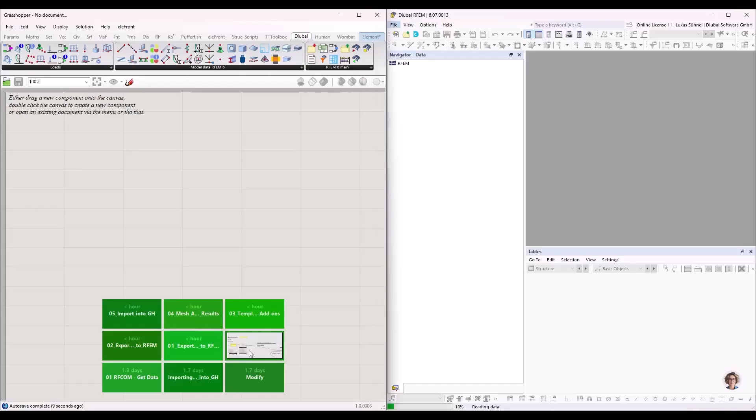Okay. Example 5, the last example, and then we are already done for today. Oh, actually, I can leave the file open. The last example is about the modification of an active RFEM 6 file. Imagine you created a structure in RFEM, and for some reason you want to modify certain parts of it, maybe parametrically, that's why you use Grasshopper.

That can be done, and I have here again a little sample file that is covering 2 tasks. The first task is to modify these 2 members, member number 5 and member number 7. We want to assign hinges at the ends, because they're connected to the web of the column. And the second task will be to move the opening. So let me show how that can be done.

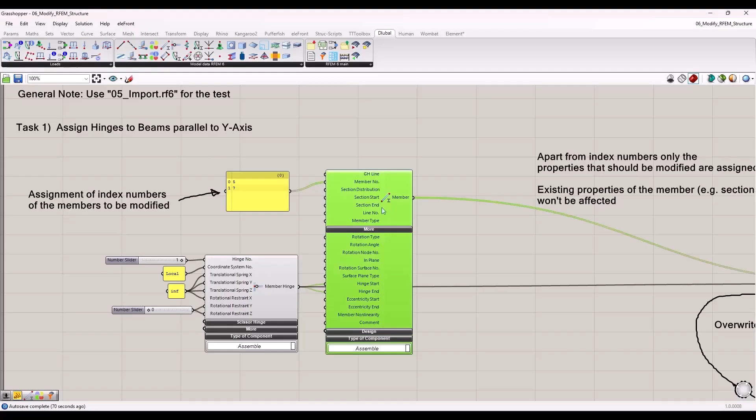Basically, we have to use a member component for this case, because I want to modify my member. I tell my member component it should apply my changes to index number 5 and 7. I want to modify member number 5 and member number 7. And then I only apply the changes that I want to have. In this case, I plan to extend them with a member hinge on both sides.

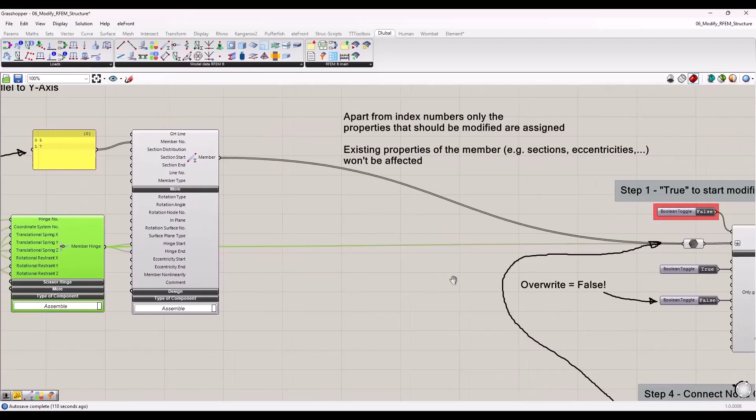It is not required to define all the other information again, the section, the eccentricity which is assigned to these members. You only assign what you want to modify or what you want to add. Then you connect the component again with the export component. And here you make sure to set overwrite to false. If you set it to true, then your structure would be overwritten during the export. That's not ideal. Set that to false, and that's all you need to do. That is starting a modification in RFEM, and I can show that as well.

So now it's writing these hinges to the members, as you can see. And the rest is still the same. Yeah, it's still the same member. It has the same section, the eccentricities, everything is untouched. It just added the hinges here. Yeah? That is task 1.

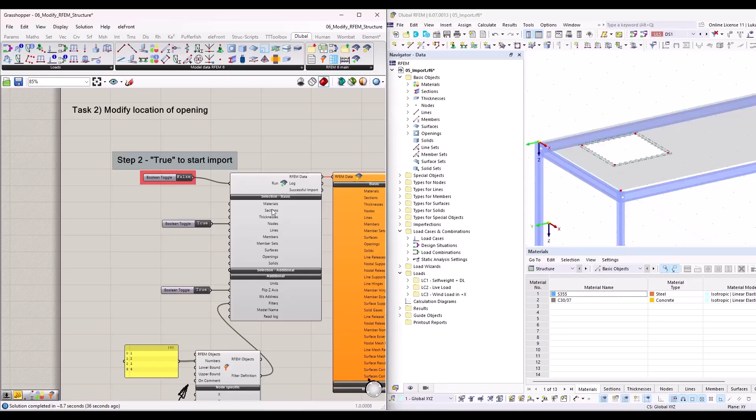Task 2 should be to move the opening parametrically through the slab. How can we do that? Well, there are various ways. I want to basically read the coordinates from RFEM into Grasshopper and then modify them. To do so, I use the import component in a similar way as I did it before in example 5. Import component, just the nodes, and again, only the 4 nodes from the opening. I don't care about the others here, so that's why I'm using a filter.

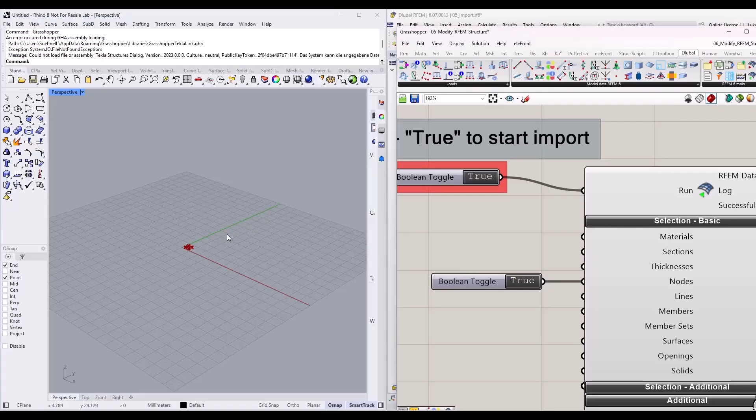Then I split the data package up into the nodes. I extract the Grasshopper nodes. We can see that here. Oh no, I didn't run the import. Just a second. Now I run the import. Okay, so those are the 4 nodes that I just imported, and then I basically modify them.

In my case, I move them with the MD slider, so I can easily move them around to the expected new location. And then I use again a node component to which I assign again the index numbers of the nodes that I want to modify. Actually, I could have connected this panel also to this component. I somehow copied it, but it's the same content. And then the Grasshopper node input with the nodes I just copied with the move component. So basically, I tell my component the new location of those 4 nodes comes from Grasshopper, from that component.

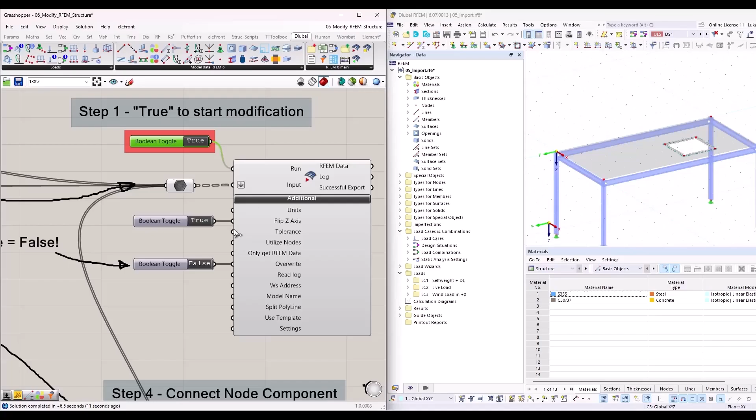Then I need to connect that as well to the export. It's not connected yet. And can I move it? No. I hope we can see it live. Then it will automatically run. Yeah, it's already done. It will, because I left the export open, basically. It started the export directly, and it moved the opening from the left-hand side to the right-hand side. It's like a live link now.

So whenever I, let me do it this way. When I move this now to another location again, then we should see it moving to the new location. So you can modify an active structure via Grasshopper. And the key is to set the overwrite to false and assign the index numbers of the objects that you want to manipulate. That's all.

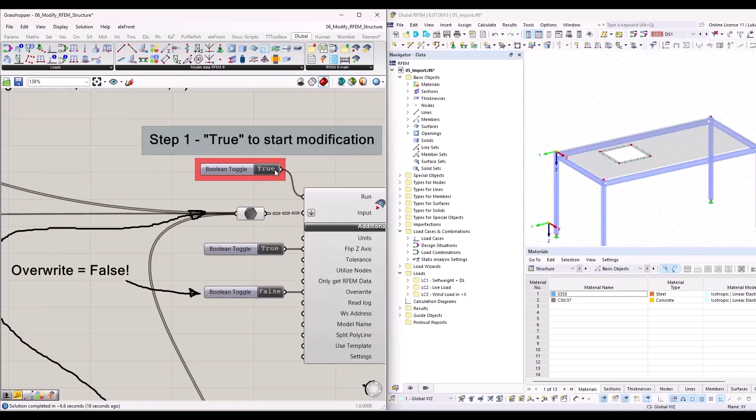Okay, that was the last sample file for today. As a little recap, I wanted to show to those who haven't seen it before or those who are interested the capabilities of our Grasshopper plugin. You were able to see that we can export model data, load related data, the loading as well. We can run calculations, export results, import them again. In general, we have an import from RFEM into Grasshopper. So I think the main components are included, so you can cover your structural analytical models that you do on a daily basis. And that's what I wanted to show today.

And we also, as I said, hand these files out. You can download them from the webinar page, so you can use them as a little help file, as a guideline when you start your own project.